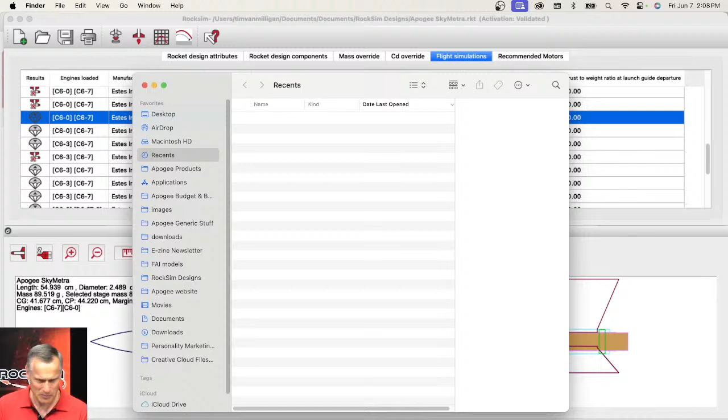And so by default it's called table.csv. And let me throw it on the desktop and hit save. And it says there's already one there. Let's call it table 1. I don't know what that other one is on the desktop. And then we'll go to my desktop. And what I'm looking for is, here's table 1. If I open it, let's see what it looks like.

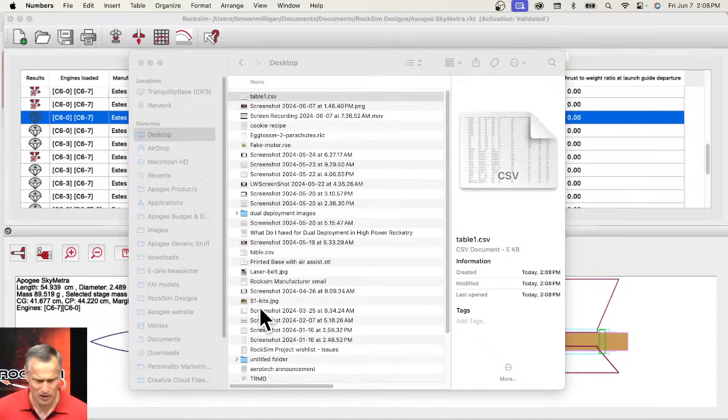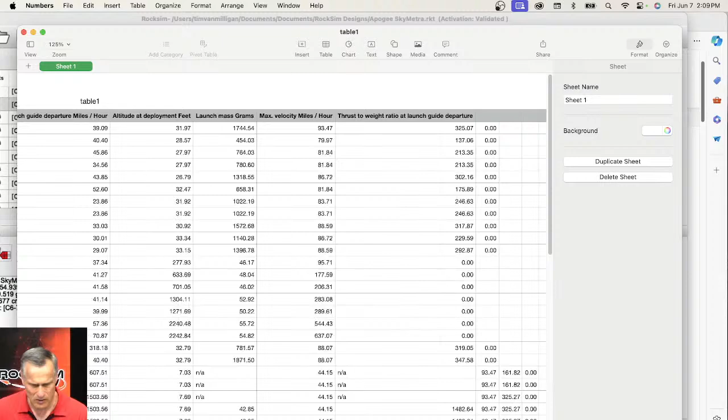For me, on the Macintosh, it's opening up a program called Numbers, which is very similar to Microsoft Excel. So this is a table, and you can see we got columns here, and it matches this table right here. So we have results, engine loaded, manufacturer, max altitude. Oops, I wanted to move this over so you can see it is a table with all kinds of data in it. And once you got it into a table, you can do sorting on it.

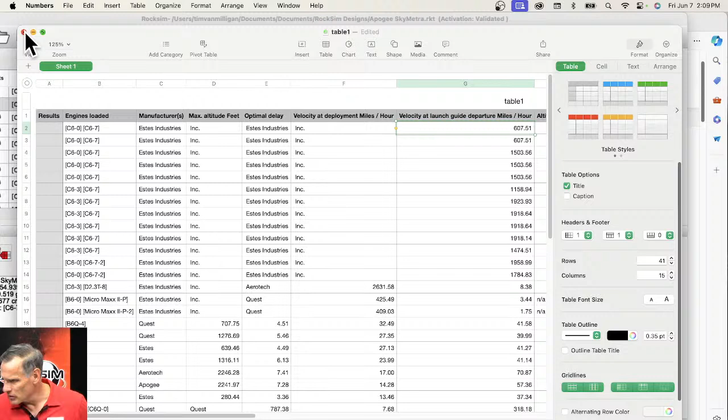I'm not sure, sort descending. So then it resorted. It's interesting, it's got Inc. here. So is that part of that table? I don't know. But anyway, the advantage of exporting it as a table is the formatting. You can change the formatting and you can sort things and things like that. So he's saying that if you change the name from table, cancel that.

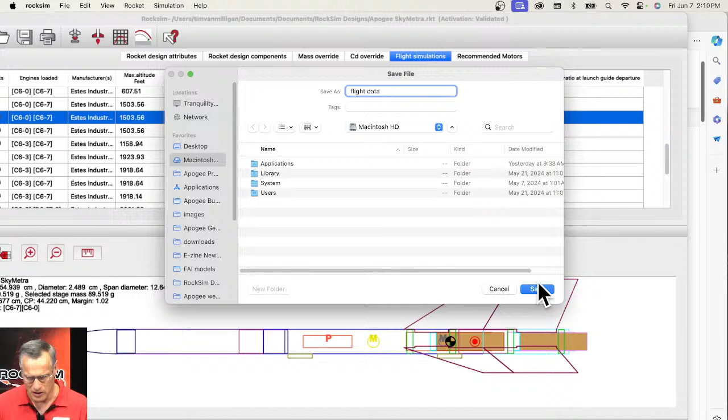Delete. Okay, so if I do export table, if I change the name, you got to watch the suffix here, the last part of the file name. It's .csv. So if you just randomly change this to flight data and hit save, I don't know if it's going to recognize it as a CSV format. It might just recognize it as a plain text file, which is what he's saying.

Let's go back to the desktop. I don't know where I put it. Export table, I probably put it someplace. I put it in the Macintosh hard drive. I didn't put it on the desktop. Let's go try it again. Flight data, save. Okay, and then go back to my desktop. So here's flight data, and if I open it up, yeah, it opens up as just plain text.

Because it doesn't recognize that you wanted to separate it as comma separated values, which is what CSV stands for. So make sure when you save it, you add the file extension .csv on the end. So I'm going to add it, and then if I open it up, this time it does open it up in Numbers. So that is how that works.

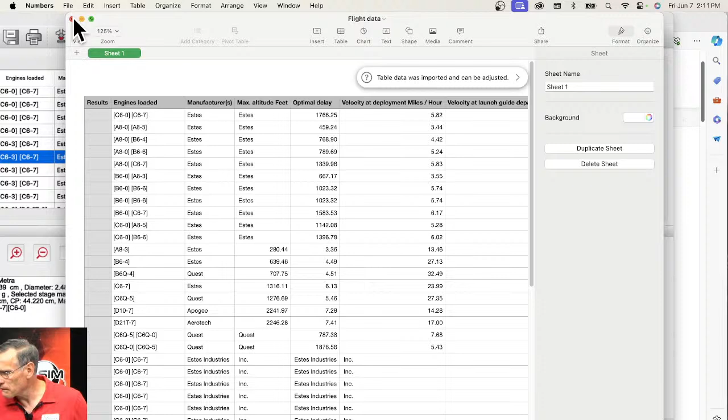And David says yes, if you specifically add the extension to the CSV file name, it will do it. It's just inconvenient. Yeah.

Terry Wheelock says, can you make a square tube fin in RockSim? I just thought of a cool design. And then we have F.A. Abdallah, and he says, is RockSim free? Well, there's a free 30-day trial, but after that, it's $50. So you get it free for 30 days.

So, square tube rocket. I have done this before. It is not easy, but it can be done. So let's start a new design. So I'm going to click the File New button here. Save my changes? I'm going to say no. Okay, so to start a design, we're going to work across this row. So first, the design attributes, and we'll call it a square fin rocket. And that's all I need to change.

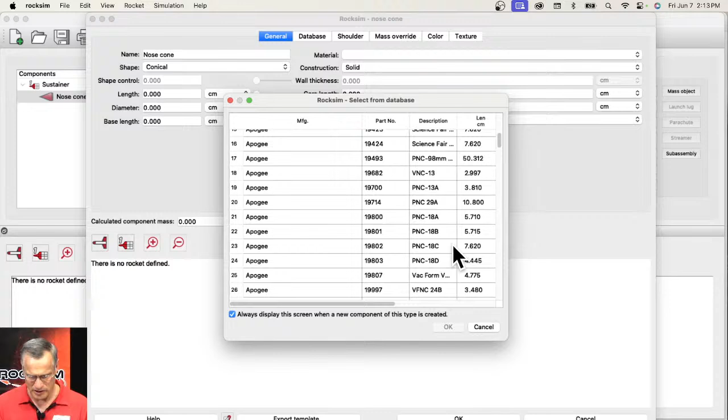So then we need to do the rocket design components. So we're going to start with a nose cone. And let's make it like a BT50 size, which is 24 millimeters. Click OK. Holy cow. I got to change something here.

And my line width is all messed up because I was playing with that before. So under Preferences, under 2D Drawing, I'm going to use the default pen width here and click OK. And then you get a nice drawing. Alright, so

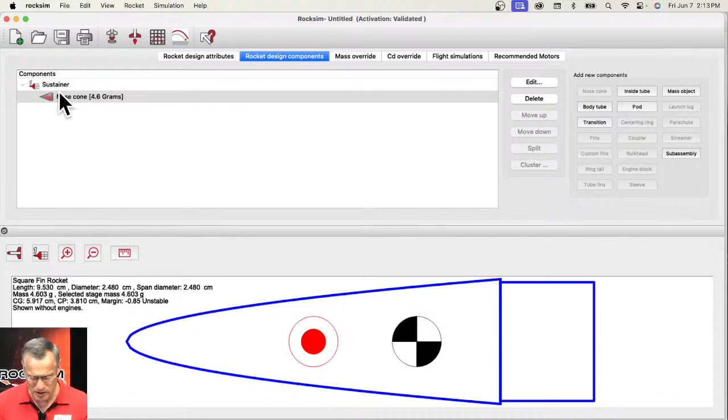now we're going to add a body tube to this. Add a body tube. And this is a 24 millimeter. Click OK. So there's the nose cone and the body tube. And let me make this screen bigger so you can see it and you're not distracted by what's going on underneath. So this is the editor for the body tube right here.

And you can change the color, and I like to do that just to make sure that the colors are all cool looking. And the 3D color, let's make it orange. Click OK. Okay, so we got a nose cone and a body tube. Alright, so we're going to make square fins. Okay, so the way to do this, Terry, is you got to use pods.

Okay, so a pod is a collection of parts that are on the outside of the rocket. So here is the pod part. So we're going to add a pod, and we're going to call it square fin. And I'm not going to eject it during the simulations. Right now the pod is located right here, and that's what the symbol is. And so we're going to move the location. We're going to add it to the back of the rocket right there. Let's see.

And let's click OK. Alright, so now we're going to add components to this pod, and we're going to add fins. We're going to add 4 of them. This is hard. Okay, so we're going to add a fin, and this is going to be, let's call it a square fin. So first of all, when you ever start a new component, it looks in the database. So that's what it brought up. So I'm going to exit out of the database. And I'll make this screen bigger here.

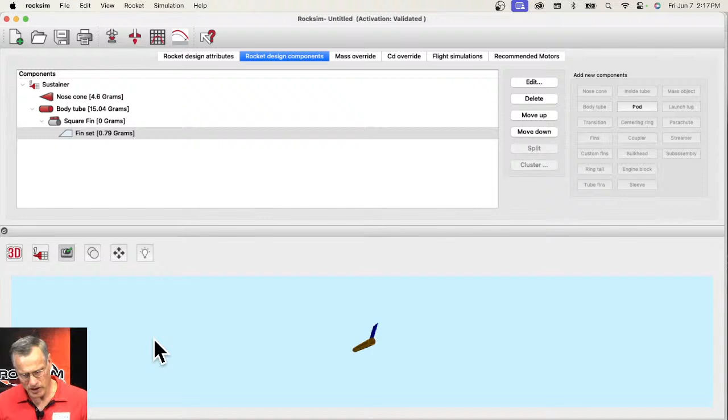And if we look at it in 3D, which is this button right here, select 3D, we can see our rocket. And we rotate it, we can see it looking like that. Okay. Okay, so now I'm going to have to change something here. So I'm going to go back to this fin. I see what I want to change. So if I look at it from a base view,

so there's the fin. So I'm going to make this 2 fins. You can see now there's 2 coming here. And why am I in centimeters? I'm going to make this 1 inch. So now it's still 2 inches all the way, but now I'm going to spin it around so that it's horizontal. So I'll do that in the radial position. And I'm going to change that angle to 90 degrees. And see, basically what I did is just I flattened it. So now we're going to build 2 more or 3 more fins off of this.

And let's change the color here, 3D color, let's make it green. And we'll make it a darker green here. Okay, so there's our start of the fin. So now when we look at it, you can see it like that. Alright, and now we're going to add a vertical fin to this panel. So we have to add another pod.

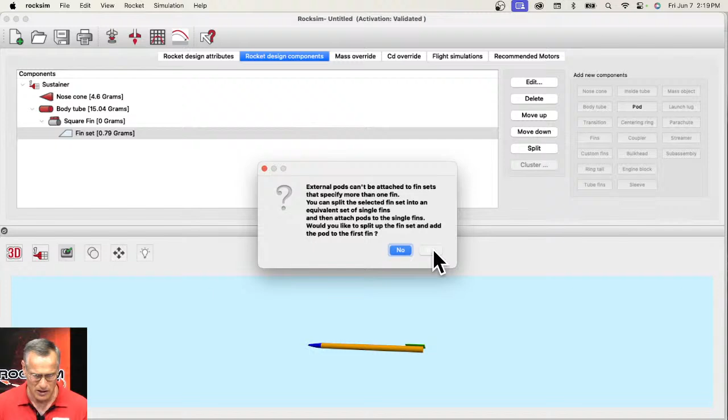Okay, so basically it says I can only add a pod to 1 fin, and that fin set has 2 fins, so we need to split them apart. And what it's telling me is that it's asking me, do I want to split them apart and make them 2 separate fins? I'm going to say yes. So when I do that, you'll notice back here I've got fin number 1 and fin number 2, and we're adding the pod to fin number 1, so that's the fin on this side.

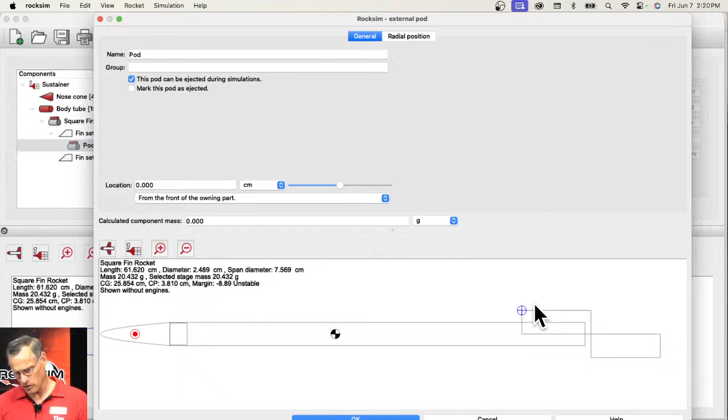And again, this blue circle is the location. Let's put it in 2D. Let me move this screen. It's being cut off here. Make sure you can still see it all. Okay, let's change the view to a side view. Holy cow, we got something going on there. We'll have to fix that later too.

Alright, so that's our pod, and we'll just leave it called a pod. So it's going to be attached right there. Well, when it split my fins, it split it weird. Okay, so I'm going to add a fin here to this pod. And it's always looking in the database, so I'm going to ignore that. And now I need to look at it from this view. It's still in centimeters.

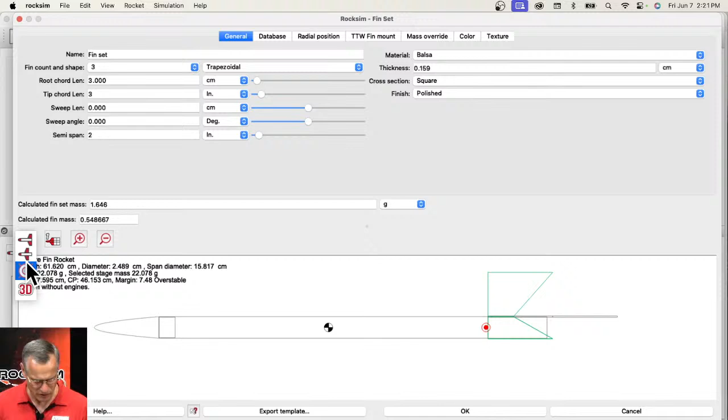Okay, so the root chord is 3 inches. The tip chord, I think, is 3 inches. The semi-span is 2 inches. Look at it from 3D, see what's going on here. So this is centimeters again. I was like, why does it look so weird? 3 inches. Okay.

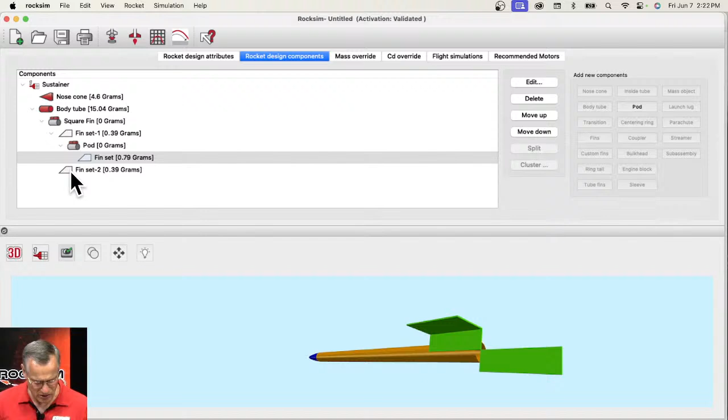Alright, so if I look at it, it looks weird. So ignore this one down here. We're looking at this one right here. And we need to change that from a 3 fin to a 1 fin. Alright, so that looks a lot better, right? I like it. And then we'll click OK. Alright, so now this other fin right here, I'm going to delete it because it's just ugly looking. Really delete that component? I'm going to say yes.

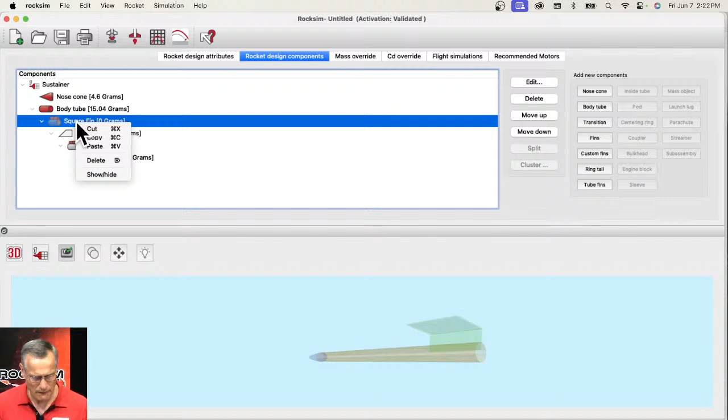Okay, so what I want to do is I want to take this fin right here and I'm going to copy it. And I'm going to paste it to this pod right here. And when I did, it put it in a funky location. And I don't like it, so I'm going to undo that by deleting it. Delete it, yes. Okay. First of all, I need to get back into my units of inches. So I'm going to go to the preferences, go to units, and length is inches. This way I don't have to keep changing everything.

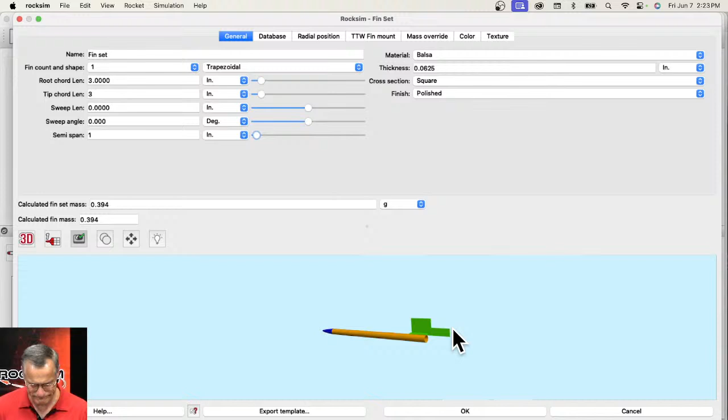Alright, so now I need to get this other fin going across. So that's the pod. I'm going to add a fin to that. Cancel out of there. It's going to be a 1 fin. And the root chord is 3 inches, tip chord is 3 inches, and the semi-span was 1 inch. And why did it add it to the back? Yeah, it's like my geometry's wrong for some reason. I have to contact the programmer about that.

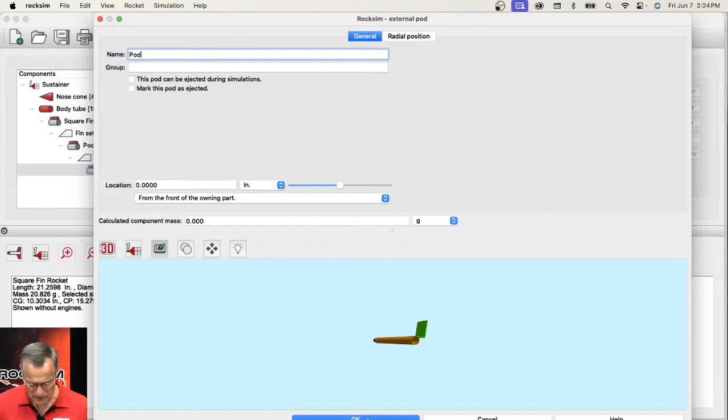Delete it. Yes. Okay, so we're going to try from this fin and try to build the box around it going the other direction. We'll go across, then down, and then that way. Okay, so let's add a pod to that. And we'll just call it a pod, although we don't want it to eject. Okay, so now we're going to add the fin, cancel, and it's going to be a 1 fin, 3 inches, 3 inches, semi-span 2 inches.

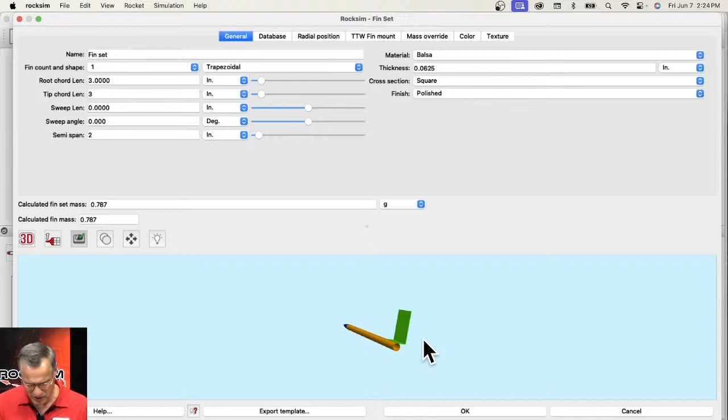Okay, so you see it did add it, so now we just need to rotate it around, so we're going to do that in the radial position. We're going to build it this way, so it's going to be minus 90 degrees. See, it's starting to take shape. Okay, click OK.

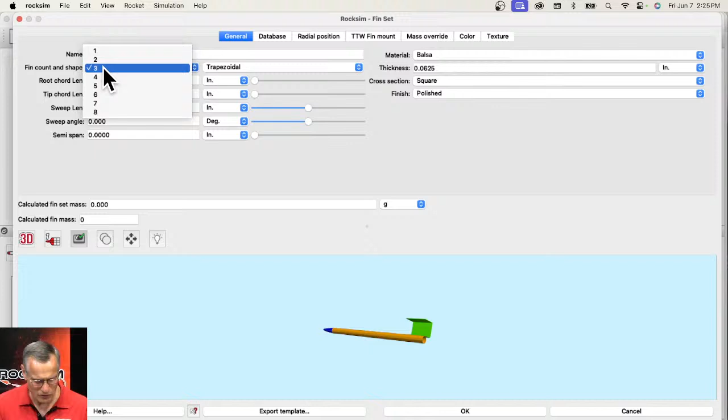Alright, so we're going to add a pod to this one. And we're not going to eject it. Click OK. Add the fin to that pod. Hit cancel. Alright, so this is going to be a 1 fin again. 3 inches, 3 inches, semi-span 2 inches.

Okay, so we need to rotate it around. This time it's going to be 90 degrees this way. So it's minus 180. And then I can click OK. So you see what my box fin is looking like. So we just need to add the one last one.

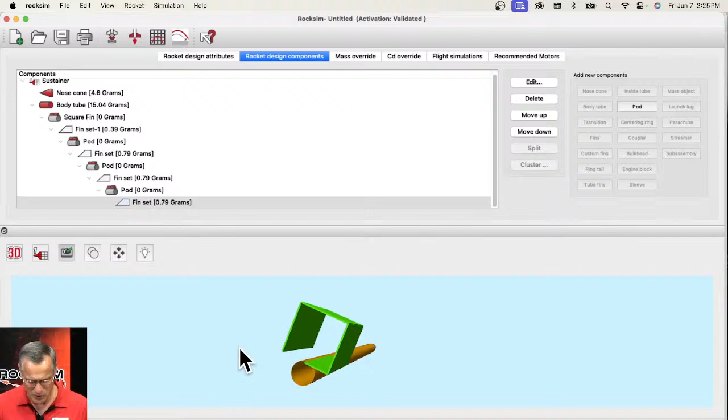So again, I'm going to add a pod. I'm not going to eject it. Click OK. And to the pod, we're going to add the last fin. And I'm going to cancel out of that database. Make it a 1 fin. 3 inches, 3 inches, and then the semi-span is 1 inch.

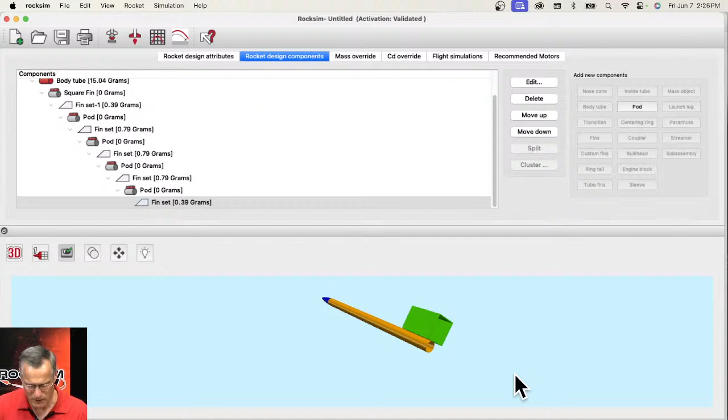Okay, where did it put it? Let's bring out the radial position. And there it is. It kind of got hidden there. So we need to swing it around that way, like a barn door. So it's going to be 90 degrees. Okay, so now we have a rocket with a square tube fin.

It took a little while. We added 1, 2, 3, 4, 5 because of some little error in the geometry. It lost its reference point, and I will contact the programmer about that to see if we can get that fixed. So now let's save this, and I'm going to save it in RockSim Designs, and I'll call it a square fin rocket. Hit save.

Let's see if we can duplicate this on the other side of the rocket. So I'm going to select this right here. We're going to do a copy, and then we're going to paste it to here. And if it works right, it should paste it exactly in the same spot.

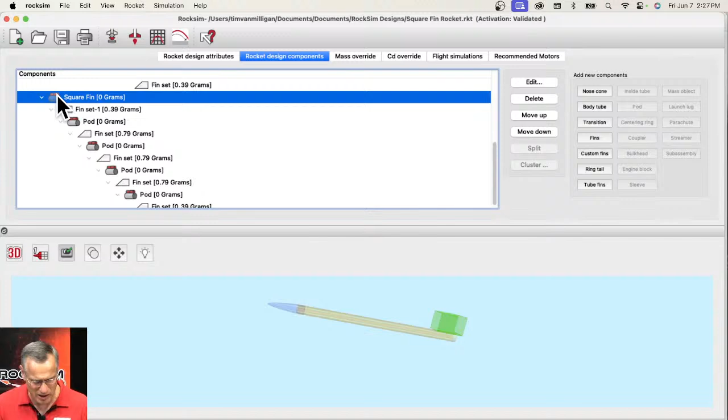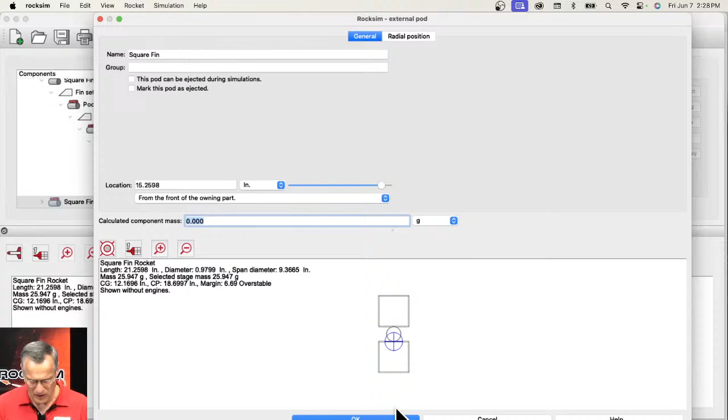So now we're going to open up that fin. We're going to go to the radial position tab, and I always look at it from the rear view. And let's swing this around. So it's going to be 180 degrees. And there we go. So duplicating the fin is easy. Creating the fin is hard, but it can be done.

So let's save that again. Let's put an engine mount and fly this thing, right? So let's put an inside tube into here. We might as well do the whole thing, right? Let's put an 18mm engine tube in there, and let's look at it from the side view. Okay, so this blue tube is our engine mount tube.

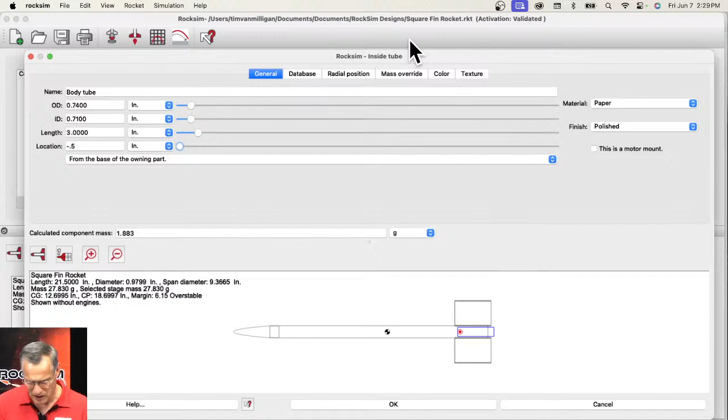Let's make the length 3 inches, and let's put it at the base of the owning part. It's hanging out the back minus 0.5 inches, so it hangs out the back a little bit. This is a motor mount tube, so we'll check that box. Let's make the color red, and over here we'll make it this lighter blue color. Click OK.

So you can see we're starting to put it in there. We need some centering rings. So let's add our centering rings. Let's collapse all of these fins. So here's the body tube. That's the engine mount tube. Let's change the name of that so we know what it is. Click OK. Okay, so now let's add some centering rings.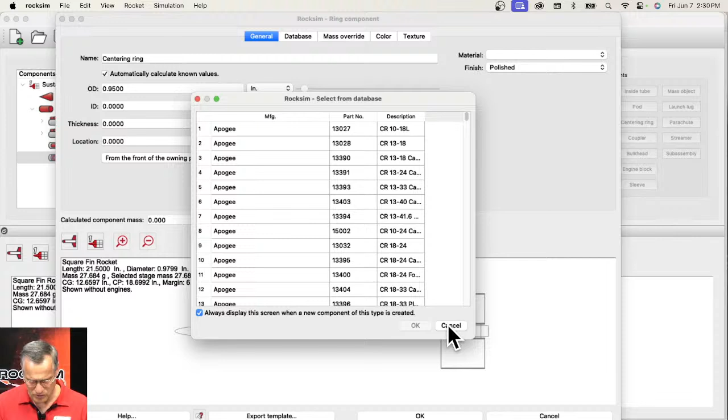So select the body tube, come over here to rings, centering ring, and we'll just cancel out of that. So right now it's right here, and we'll make the thickness of that ring 1/4 of an inch and change the location from the base of the part to 0 inches. And so it moved it right here. Material, let's call it paper. Click OK. Alright, so that's the aft ring.

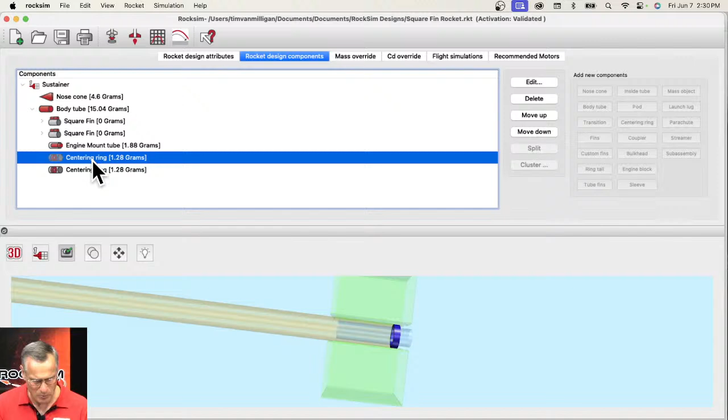Let's copy it and paste it. Copy. And then select the tube and hit paste. And so it pasted it right on top. So we'll move one of these. Let's move the top one. We'll call it the front centering ring, and then we'll change the location just by sliding it here. So what we did was just slide it from here to here, and that looks okay. You notice our center of pressure looks pretty good right now.

Okay, let's add a parachute. So here's a parachute, and this time from the database, let's do a 15-inch parachute, and it's very thin, 0.002. So the mass of that parachute is 5.33, 15-inch outside diameter. Let's make the color red. I like that color.

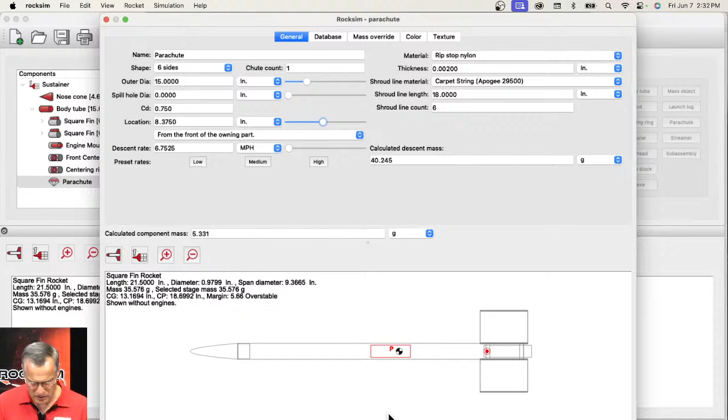Let's change the location. Right now it's interfering with the nose cone. So let's change the location right here. Just slide it back into the middle of the tube. I think that's okay. It says the mass override is on. Okay, so that's clicked OK. So there's our parachute.

You can add a shock cord. So again, to add a shock cord, there's no button for shock cord, but we'll use what's called a mass object, which is anything that doesn't have a defined shape. We'll cancel out of the database, and we'll change the name to shock cord.

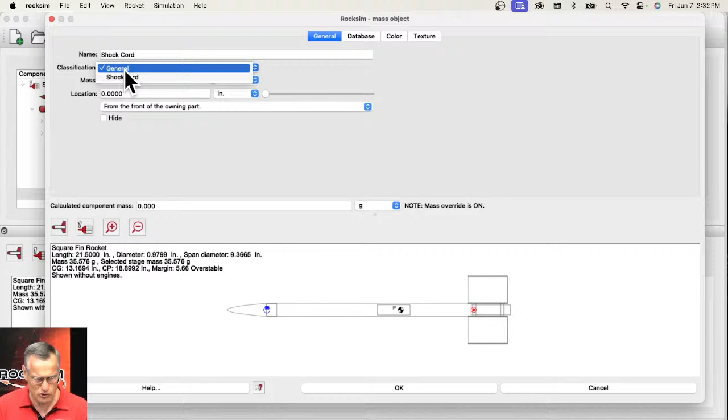And we'll change the classification from general to shock cord. And now for the material, we'll select the material. Let's go with 100-pound Kevlar. Change the length to, I don't know, we want a pretty long shock cord. 49, let's call it 48 inches.

The location right now is right here. Let's move it back to here. Let's change the color to yellow, and the 3D color to that yellowish color. Okay, so there's our mass object, which is the shock cord. Okay.

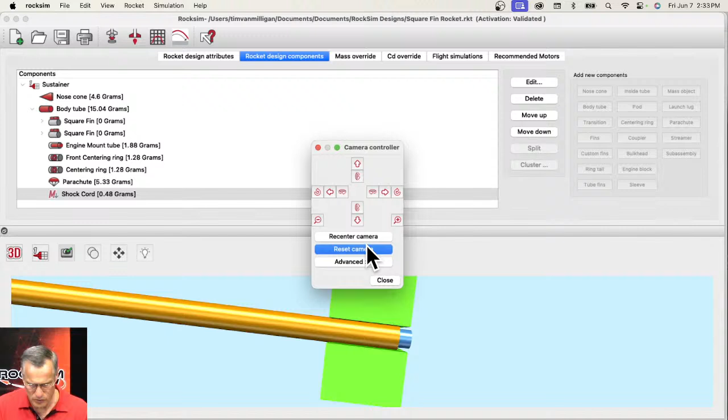Alright, so reset camera and zoom in. Close that. So I just wanted to get a better view of our rocket. Let's save it again, and I think we're ready to launch a simulation. So we'll go prepare for launch. So there's the back end of the rocket with our square tube fins.

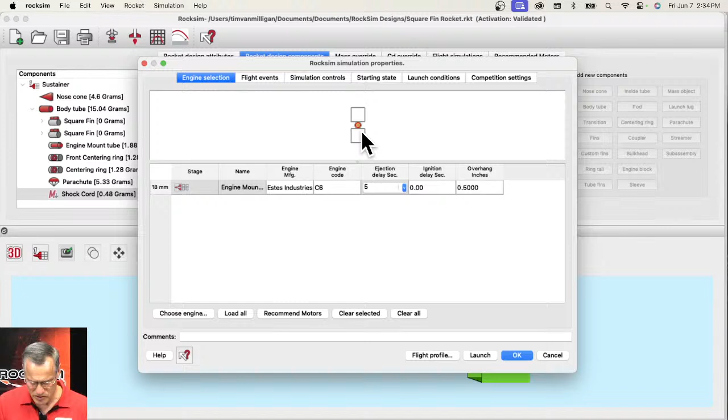And let's choose an engine. And let's go with an Estes C6. Let's try a 5. Engine overhang, 0.5 inches. Click OK. You can see it loaded the engine, and if I look here on the back, here's the rocket engine right there. So that looks good.

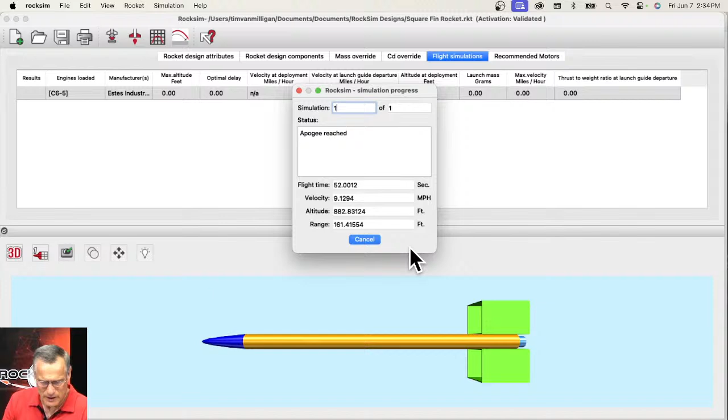And let's see what this thing launches. It looks like it's working. I know it's going to go 882 feet. So there's our rocket sitting here on the pad. And we'll launch it. It's going up. It's looking okay. It's arcing over a little bit. Not too bad. Oop, it ejected a little early. That's okay. And then it's coming down under parachute. Alright, that looks pretty good.

So let's save this one more time. And I think I want to share this with you. So to share it, I'm going to go open the launch visualizer. And let me open up a new window. File, new window. And it opened it up over here on that screen. We'll go to RockSim.com. This will allow us to upload.

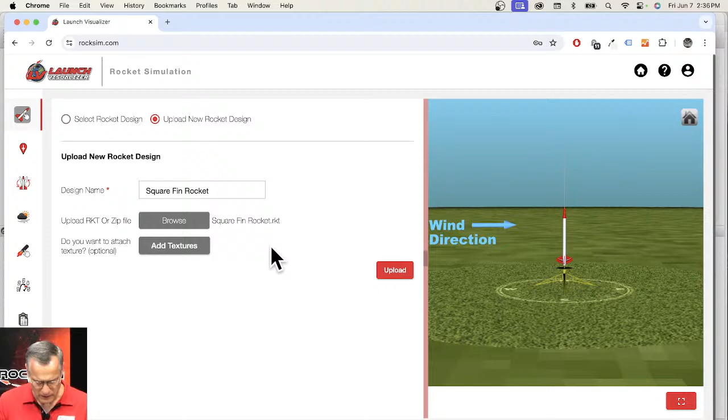Okay, so I'm going to log in into my own personal account. And we're going to upload a new rocket. And we're going to click on the Browse button. So we're going to find the file that we just created. So I put it into my Designs folder. There it is. And what do we call it? A square fin rocket. Click open. And we're going to upload it. And it's just going to take a second to upload.

And I'm going to grab something to drink.

Okay, so there is my rocket sitting on the launch pad. And let's run another simulation. So we got to choose a launch site. The default launch site is Pueblo, Colorado, where I launch rockets from. So here is Pueblo, Colorado, and if I zoom out, eventually, here's the state of Colorado. And let's choose a launch site somewhere.

Let's see, my daughter is in Virginia today. I'm not exactly sure where. I think she's close to Danville or Greensboro. So I'm doing this to say, hey, I'm thinking of you, daughter.

So I'm zooming in and I'm looking for something grassy. I'm seeing a lot of trees. Not seeing a lot of... And something happened. My computer froze. Yeah, there we go. There's a river. Oh, here's some grass. I don't know who owns this land, but they got a pool right there. I said, this looks like a nice launch site. We're going to launch right there.

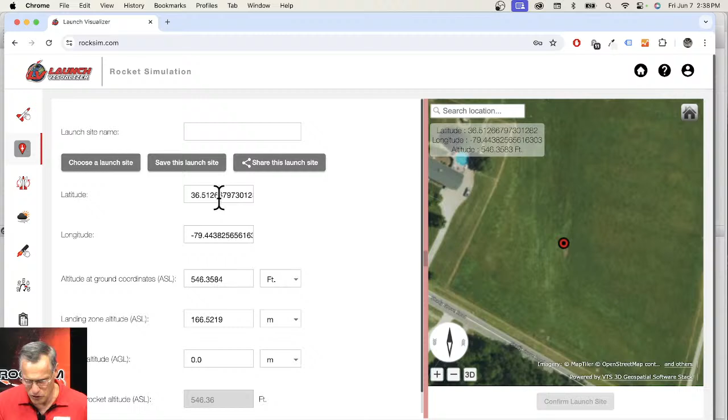So you double click on this. And I'm going to say confirm that launch site. And when you do confirm the launch site, it just grabs the coordinates. And this is somebody's private yard. I don't care. You can launch anywhere you want. So we're going to launch it straight up. So we'll leave that alone. We'll go into launch conditions. Let's change the wind to a steady wind of 5 miles an hour coming out of the west.

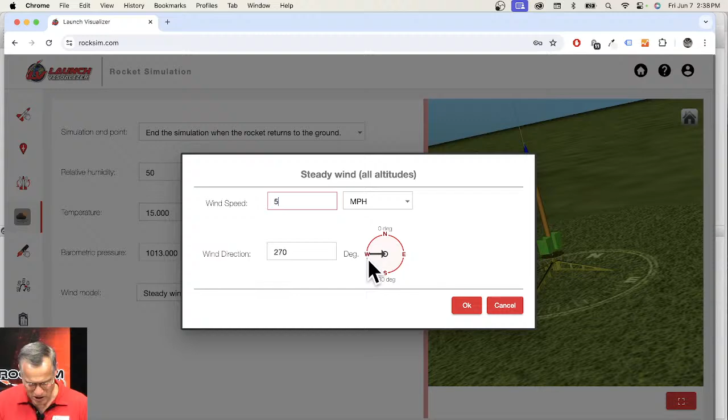We'll click OK. Let's see, our rocket motor, we're going to choose an engine. That's the C6-5. Engine overhang 0.5. Okay, so it added the motor, flight events. We're going to deploy the parachute at maximum ejection delay. And underneath my face here was the launch button, which you can't see. And I'm going to simulate that.

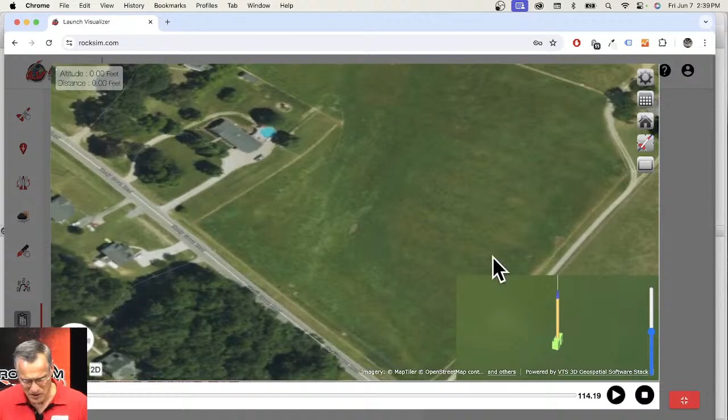Alright, so it's loading our rocket, and it's loading the launch site. So if I zoom out, so there's the pool. Our rocket's sitting right there, so here's that house. The rocket is right there where my pointer is. And let's launch it. And so the rocket takes off. It's going up.

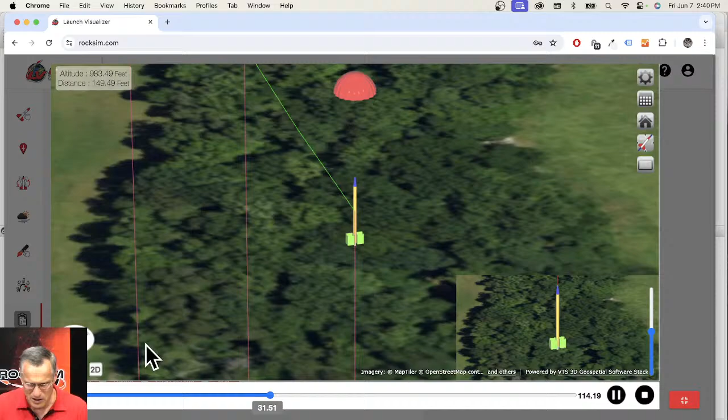It's in the air right now, and it's buried behind all this smoke. So right there, if I zoom in, we'll see the rocket coming down with our square fins. Whoops, I lost the rocket. Let's add some trajectory path, and let's see the extruded flight path, and click OK. So now if I zoom out, the green line right there is the trajectory.

So right now the parachute came out here and it's descending. Zoom out a little bit more so you can see the ground path right here. The rocket is right there, and I'm going to speed things along by grabbing the bar right here. And it looks like we landed in a little bit of a tree. Yeah, we landed in that clump of trees.

We didn't select the launch site very well, did we? That's the purpose of the launch visualizer, to really help you pick that launch site so you get your rocket back, because if it's landed in a tree, that's not the neatest thing in the world. So down here we call the mini view, and this shows a close-up view of the rocket. So let's kind of replay that.

Let's change our trajectory to this view right there. And let's turn off the curtain. That is the extruded flight path. Click OK. So the red line is the ground path. The green line is the trajectory. And this is in 3D, so you can move the rocket around and change the orientation, get a perspective on how high your rocket's really going.

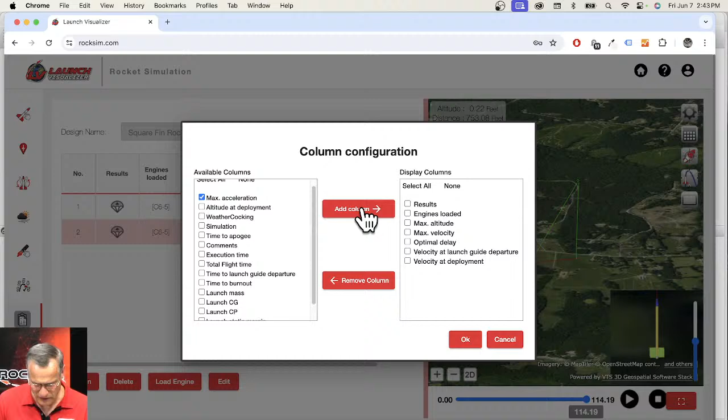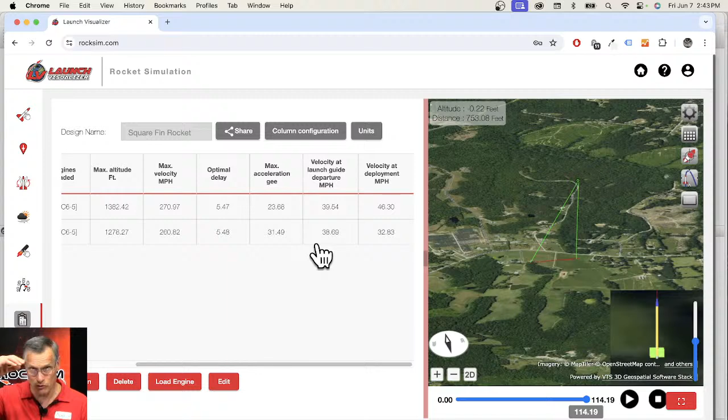So here's the maximum acceleration. On that rocket that we just did, it was 31.49 Gs. So if you put a 1 ounce payload in your rocket, it's going to make the rocket fly slower, but the acceleration of the payload and the acceleration of the rocket are identical.

So if you were in RockSim, again, it's going to be in these columns right here, and if you want to see it, just do a right click with your mouse, and it brings up this thing that says organize column. Click on that, and I can click maximum acceleration, click OK, and here's the maximum acceleration, and I can move this column around. I'll just click, hold it, and drag it right there so you can see it a little easier. So that particular flight went to 23.68 Gs. So that's pretty easy to do.

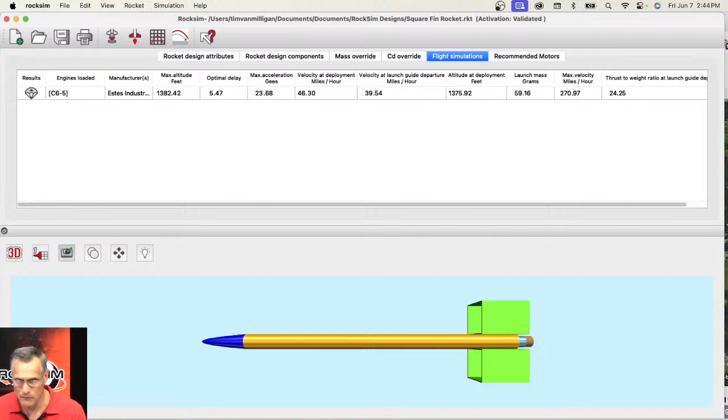Terry Wheelock says, I have determined 2 different ways. Are there others? I don't know which 2 ways you thought of, but there's always a million ways to do things.

Mark Sell says, I want to see the launch simulation on this one. I had problems simulating my Xmas tree because of the candle pods. So I ran a simulation and it worked. So I don't know what's going on with your Christmas tree, but sometimes pods, like we saw, so this is the pod.

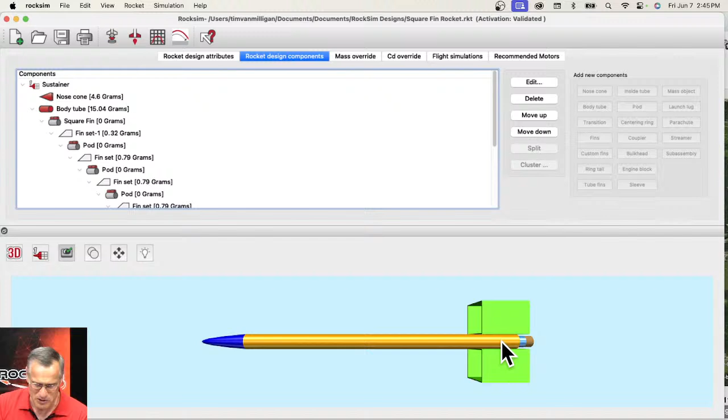Sometimes, when we first started designing this, when we had two fins instead of one, one fin was staggered. And that's an error, and something that I'm going to talk to the programmer about. But sometimes you can kick off errors, and there's a lot of math going on here when we're designing things like this that are crazy.

Terry Wheelock says, "You the man." Well, thank you, Terry. I appreciate that. David Hayes says, "Nicely done, Tim."

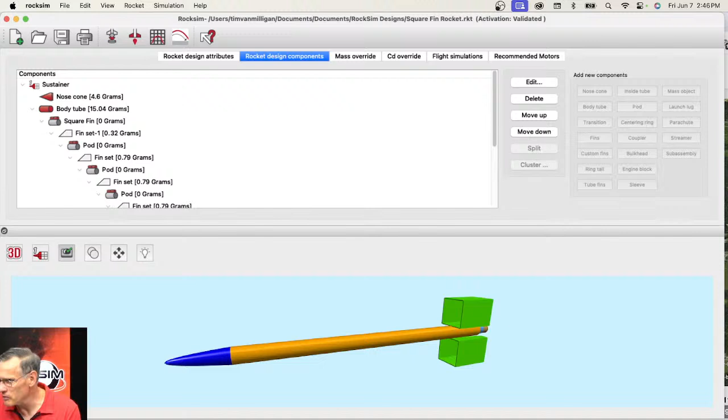David Hayes says, "Can you post a copy of that design somewhere just for fun?" So right now I shared a simulation, so I would have to upload the file to the Apogee website. I'll tell you what we'll do.

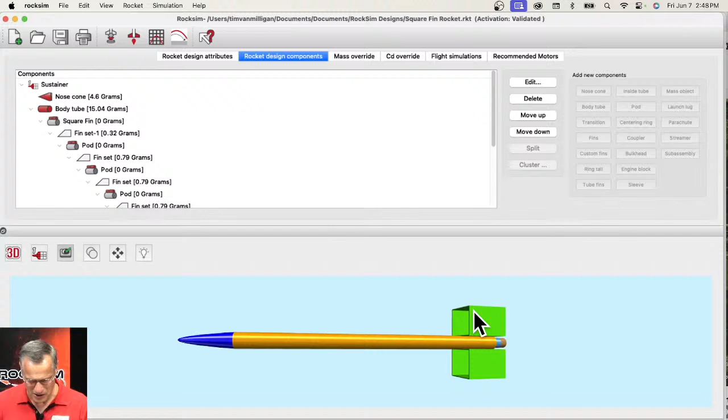Okay, so that was very cool. You made me work. Where'd my RockSim go? RockSim, here we go. And you can do some fun stuff with this. So, for example, I'm going to delete one side. It's asking me if I'm sure. I'm going to say yes. So we deleted one side.

And let's modify this one over here. I want to make it so the front end is not perpendicular. We'll make it slanted. I know the first one is the one against the tube, so we want this side one right here. So if you highlight the fin you want, we're going to open that fin,

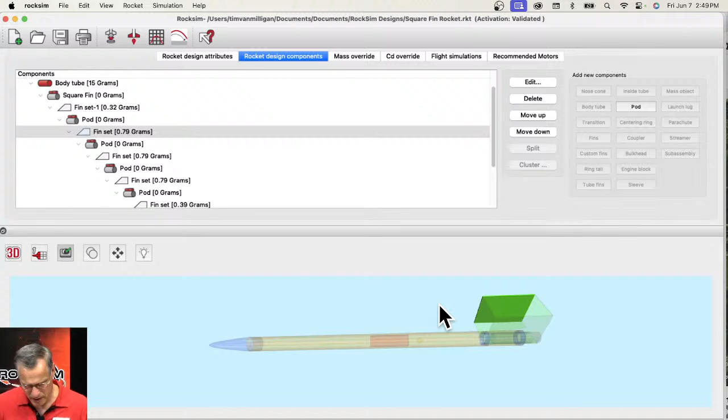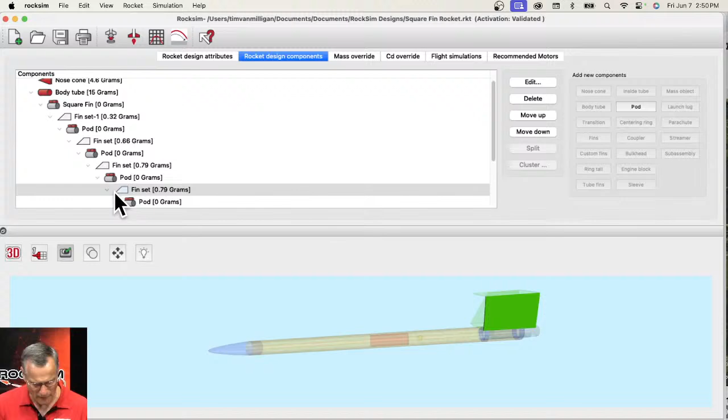and now this time we're going to slant it. So we're going to make the tip chord 2 inches, and we're going to sweep it 1 inch. So we swept one side like that, and let's click OK. And now we'll do this side, and we'll do the same thing. The tip chord, we'll make that 2 inches and sweep it 1 inch.

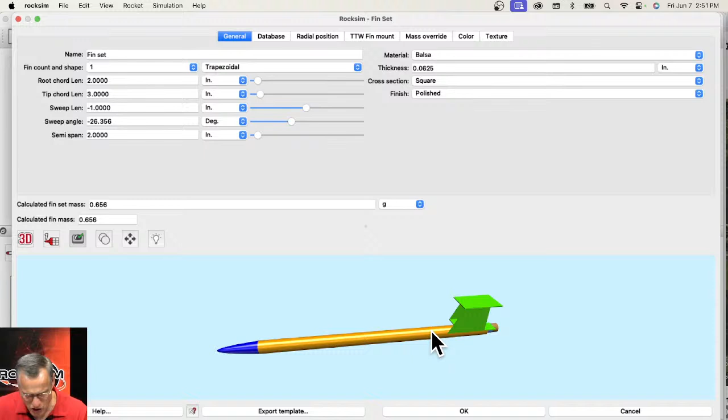That's weird. It should have swept it the other direction. I think I know why, because we changed the radial position. So we got to go backwards. Our tip chord has to be 3 inches, the root chord has to be 2 inches, and the sweep length is -1. I keep thinking that's 3-dimensional. That's not 3-dimensional. Okay, so we got it in the right direction, but we got the location in the wrong spot.

So, to fix that, I'll click OK. I'm gonna save this one as a different name. Save as, I'm gonna call it slanted square fin rocket. Okay, so now this fin right here, I'm going to go to the pod, and I'm going to change the location of the pod, see if that will work.

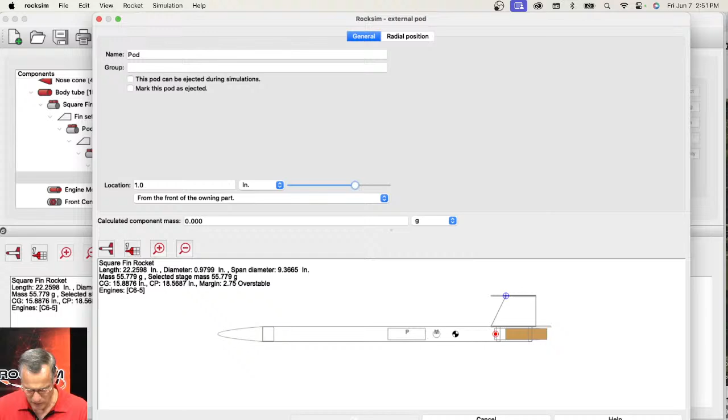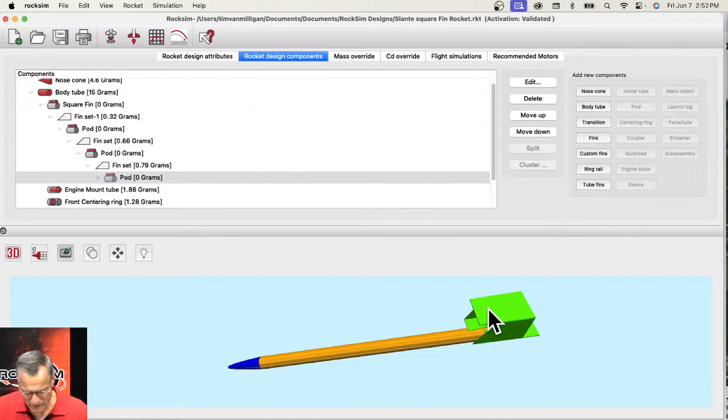So right now, here's the location of the pod, and let's move it back 1 inch, and click OK. Okay, so that worked. All right, so now there's that stupid fin again. Okay, so now let's change this one. That fin right there, and we're going to make both the tip chord and the root chord 2 inches,

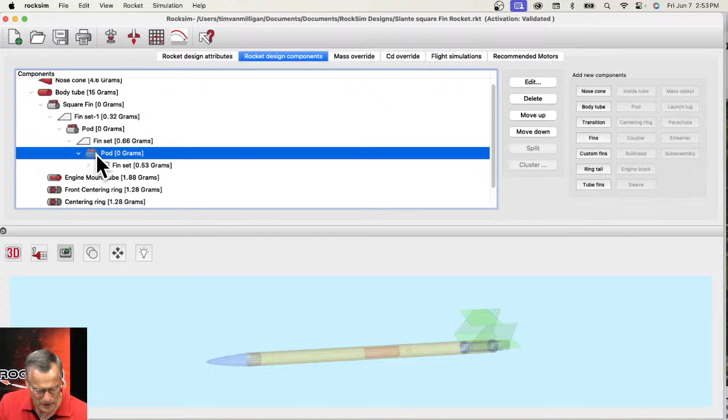and I keep thinking that's 3-dimensional. See, it's in the wrong location again. So again, we're going to have to change the location where it attaches to the pod. And so then we'll go to the pod. Is that the right one? Click on the fin. Okay, so that's that pod. And we'll change the location 1 inch.

See what happened? When I changed that one, it moved that one. All right, well, we know how to fix that. Let's change the color of this too. Okay, so now this fin, its pod, edit that pod, and the location. So we're playing with this fin right there. I think we're back to 0. Yep, we're back to 0.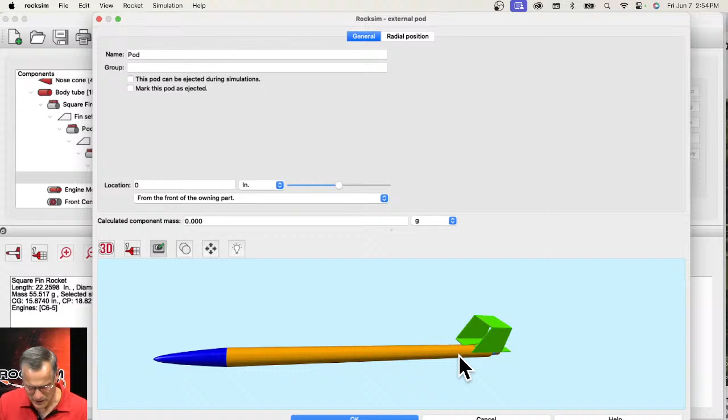Okay, so that's that fin. I wanted to change the color. Let's go purple. Just so that you can see that you can colorize your rocket.

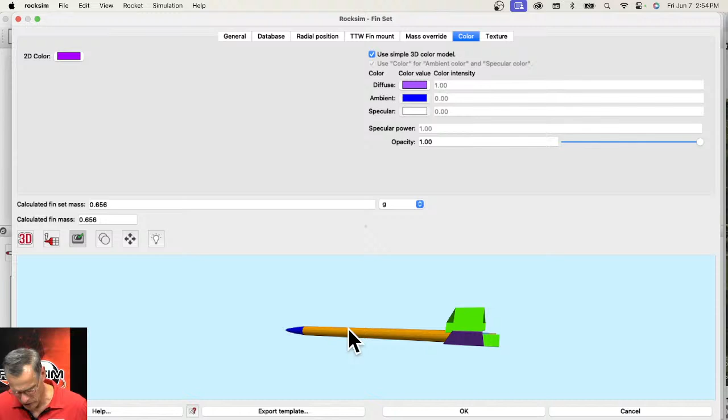Okay, so now let's fix this last fin right here. So I want that green one right there. So, oops, click OK. I'm in the wrong screen. Okay, so click on the green fin, and then let's go to its pod, and let's go -1 inch. Yep, that worked. Click OK.

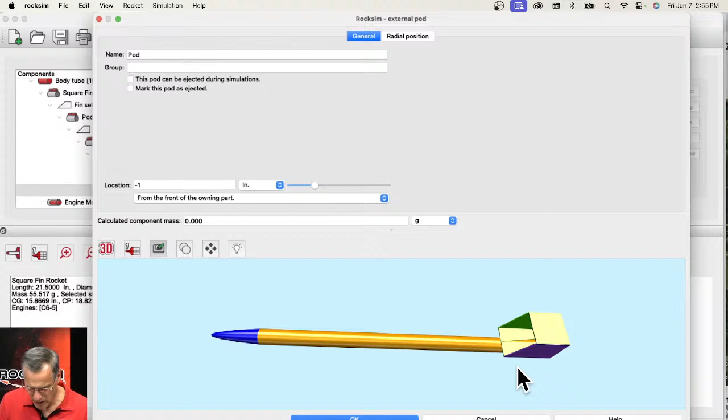And this other fin over here on this side, let's change the color of that one. So we gotta find it. So just click on it. And double click up here. And let's change its color. We'll also make that purple. Purple.

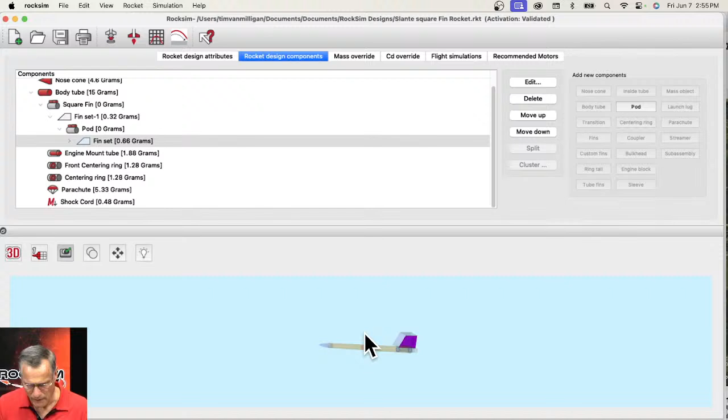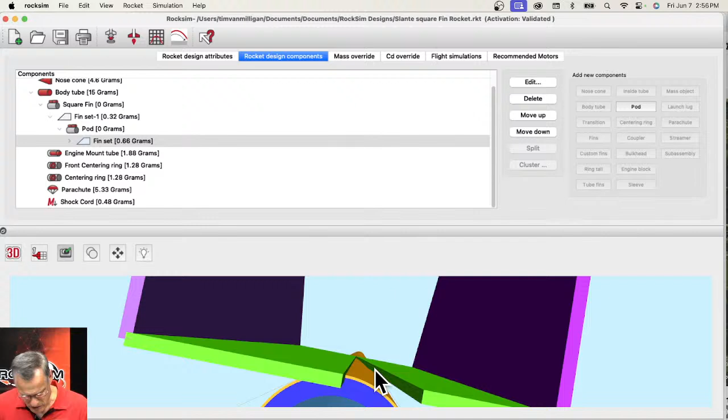Wait for the drawing to catch up. Come on. There we go. Some kind of remnant going on here. But I know it's attached right there, and I know it's a square fin. Alright, so we got a slanted square fin.

And now let's duplicate that. So we're going to copy it. I'm going to paste it to the body tube. Paste. And then, so here it is. And then we need to edit the pod and rotate it around. So let's look at it from the rear view. Go to the radial position. I'll make it 180. Click OK.

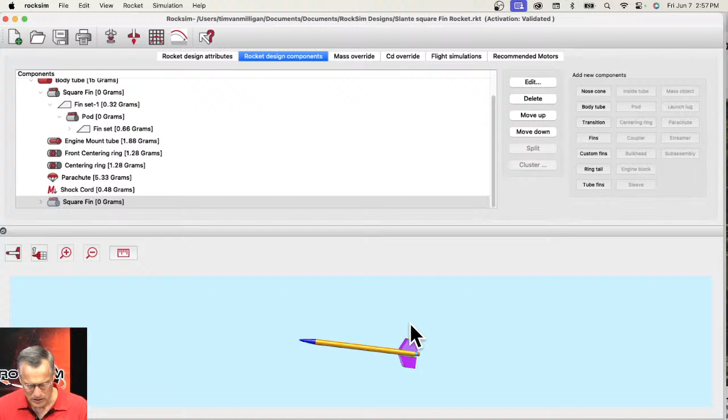Alright, so there's our slanted square finned rocket. Let's save that. Maybe I'll put that one in the show notes as well.

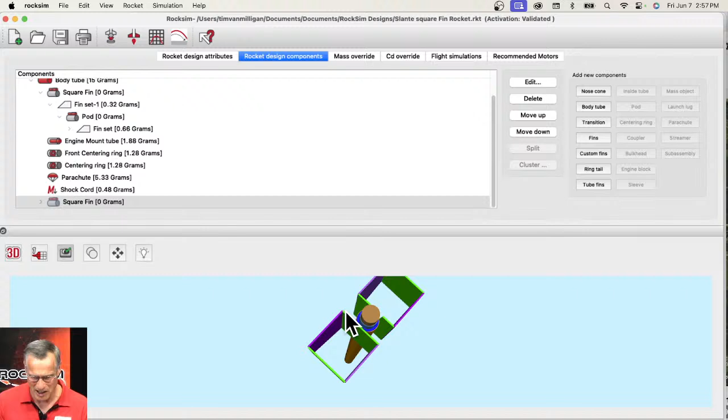Terry Wheelock says, now make a triangle fin rocket. Yes, you can do the triangle fin. It's the same process, I guarantee you. The only thing is when you change those radial angles, instead of making it 90 degrees in the corner, you're going to make it 60 degrees. And then you will get a triangle fin rocket. Guaranteed.

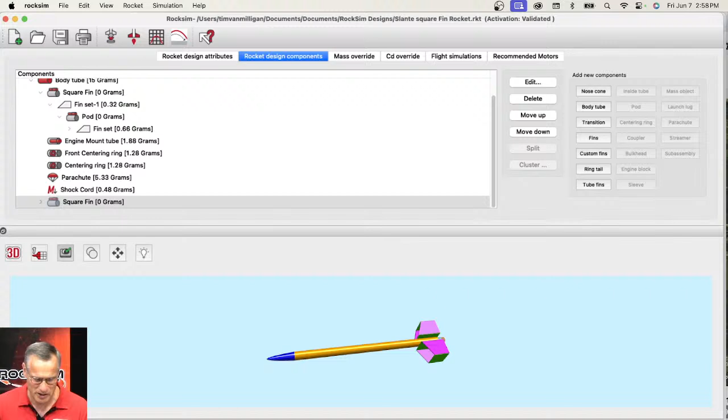Marcel says, maybe we need a small dot to locate the pod attachment point. I see what you're saying. You know, in the 2D drawing we have the locations, but in 3D we don't. That's an idea. It's a really good idea, actually.